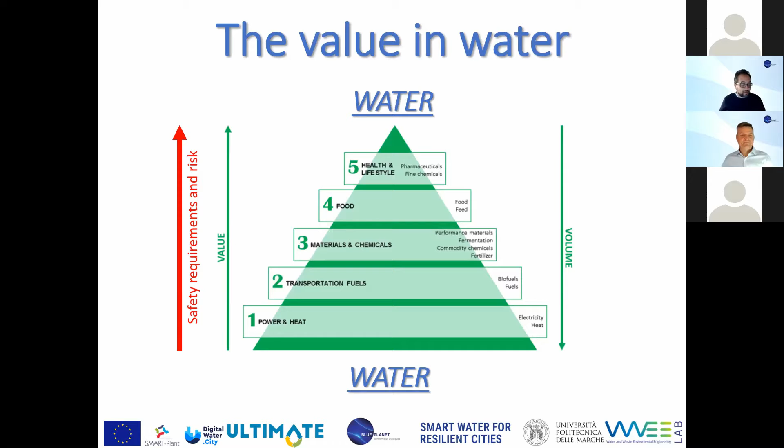So if we consider the value in water, of course, we have to take into account that the first target should be always to optimize the water treatment and, if possible, water use. So the first mission. But if we consider the pyramid, the more is the volume, the less is the value. But the more is the value, the more are the safety requirements and the risk to be managed. So energy is probably the resource with higher TRL, technology readiness level, but probably the TRL is lower if we consider the carbon footprint, and that is related to energy efficient and energy positive treatment plants.

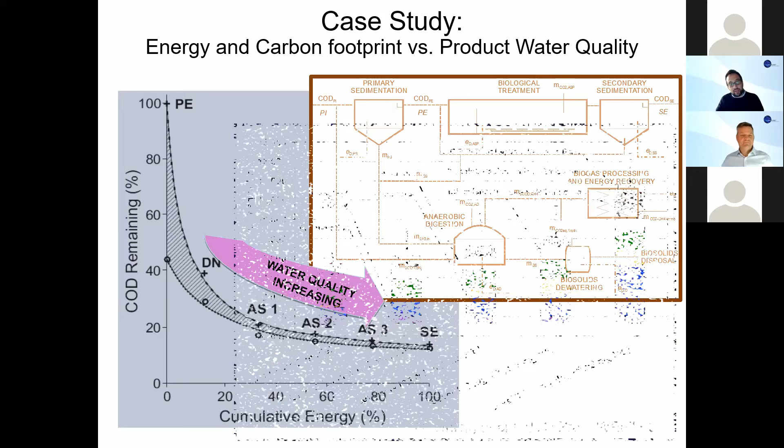This is an example of how the cumulative energy is increasing if we are decreasing the limit for discharge. And here in this graph, we can clearly see how, decreasing the limit for discharge, we are increasing the carbon footprint.

Well, dealing with energy, the energy positive treatment plants have been developed over the last 15 years, and we have full-scale examples, but most likely the best evolution has been the POWERSTEP Horizon 2020 project coordinated by the Berlin Competence Centre for Water that has demonstrated how we can increase energy positivity up to about 150% by the scheme AB plus optimization, anaerobic digestion, and power to gas, together with the advanced nutrient removal via nitrite removal.

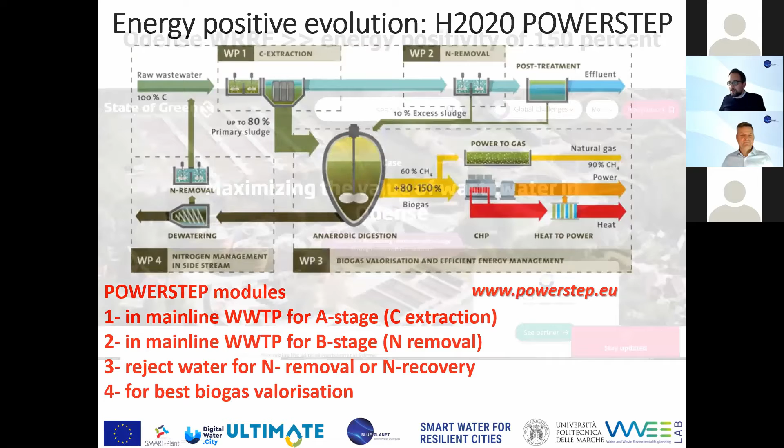So out of this innovation action, we currently have very ambitious projects, and this is an example from Denmark. The Odense Water Resource Recovery Facility is aiming at having energy positivity of 150%. So this is the status of energy: high TRL, full-scale challenges. What about other resources that we can recover?

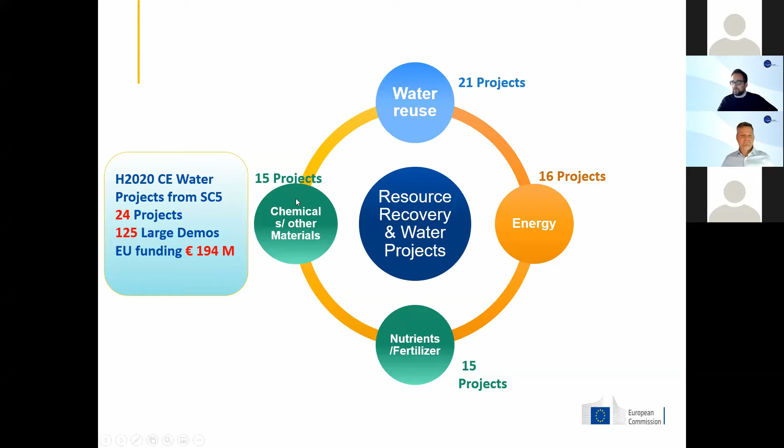Well, here I have selected some slides that have been presented by the European Commission at the workshop that we did together June last year. The European Commission has funded many projects about resource recovery from the urban water cycle for 194 million euros. In all these projects, resource recovery has been delivered in terms of nutrients recovery, mineral fertilizer and biofertilizer, but also in terms of added value organic materials such as biopolymers, such as cellulose.

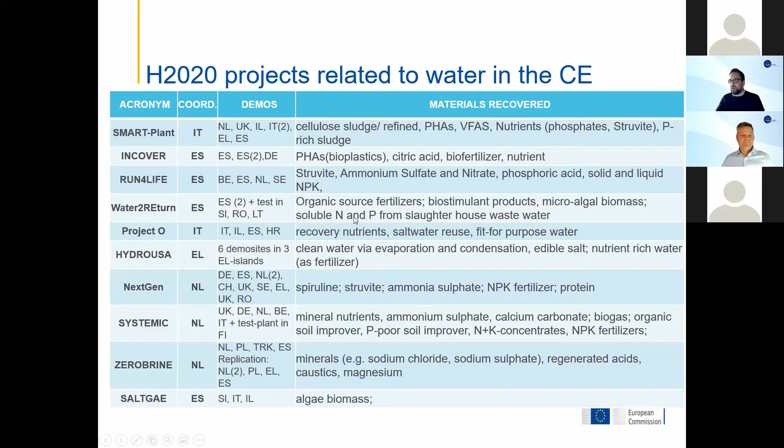And as you can see here, we have several innovation actions that have been concluded or are ongoing that are demonstrating in real environment the potential of resource recovery. But after all these efforts, all these investments that are mainly at demo to full scale, if we consider the last circular economy action plan, we can see that still water is considered for nutrient management, and water is everywhere and nowhere. So wastewater was considered an untapped resource, but actually in the current European programs it is not central.

On the other hand, as we discussed also today, these years are the right momentum because we are reviewing a lot of directives. We are introducing the new circular economy action plan. We are under revision of the urban wastewater treatment directive. So most probably our major efforts and contribution are very relevant exactly in this moment.

So when we have to address the materials recovery, if we only address the technology, we are only addressing one side of the problem, because the challenge is to keep the technical value of the material, considering also the regulation and legislation, the end of waste criteria, and together with that, we have to enable the technical skills of the water utilities.

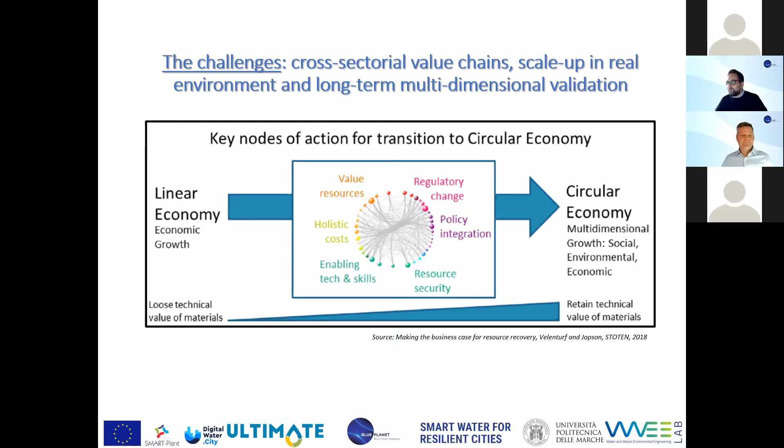So we have to integrate the existing asset by solutions that are close to what is already in place. Not to have a revolution, but to have a gradual integration. This was exactly what we did. We did the SMART-Plant Innovation Action that started in 2016 and was successfully concluded in 2020. We were integrating existing wastewater treatment plants in Europe in the Mediterranean basin in order, first of all, to reduce the energy footprint and the carbon footprint.

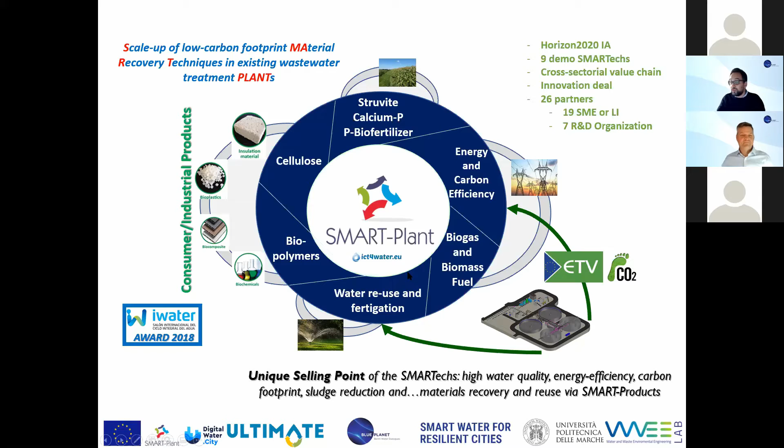That was the first point that we were asked from the water utilities, and in parallel to recover materials such as struvite, calcium phosphate, phosphorus biofertilizer, and organic material such as cellulose and biopolymers to finally deliver safe products for users or industries such as construction material and biocomposite. All this taking always into account, as you can see, the water quality that had to be delivered finally.

So here in this slide, you can see the different treatment plants that we were integrating with our solutions. And we are going from 40,000 population equivalent to 2 million population equivalent. And we are going from Israel to UK in order to have also solutions that are at a different latitude, at different conditions, at different treatment schemes with different utilities, completely public, private, or completely private.

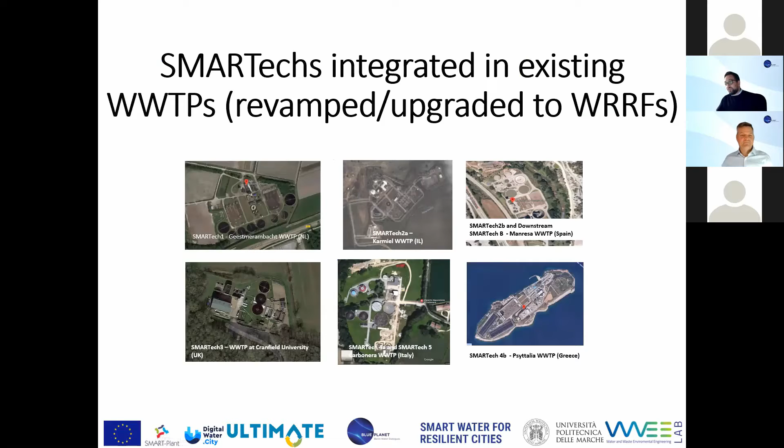In terms of technologies, we were aiming at integrating the different steps from primary to secondary to the sludge line. And here you can see the treatment plant, the key enabling process, the smart product, so the product that has been recovered from wastewater, and also all the technologies were considered for the environmental technology verification, the European protocol to validate the performances and certify the environmental performances.

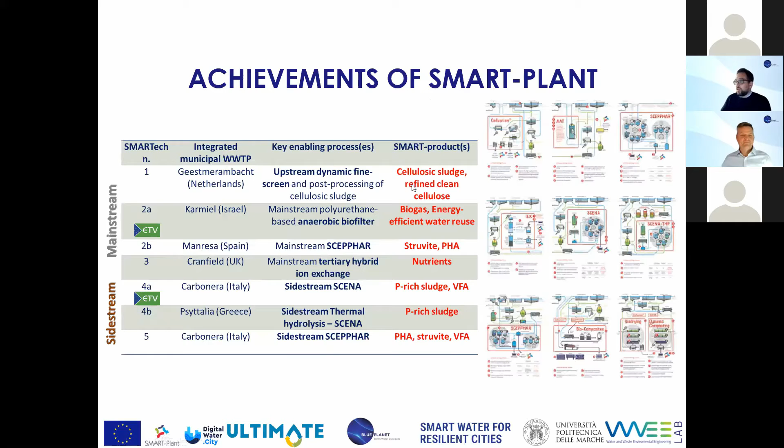Well, finally, after 4 years, we found what we call the evidence-based results. In particular, we were able to demonstrate the quantity of cellulose that we can recover from municipal wastewater, 2 to 7 kilos per person per year. How many polyhydroxyalkanoate biopolymers you can recover, 1 to 1.2 kilograms per person per year, calcium phosphate, struvite, mineral fertilizer, but also biofertilizer. All these solutions in combination can deliver energy saving from 4 to 68% and reduction of carbon footprint together with the sludge reduction. This was the first interest of the water utility, and this was the added value.

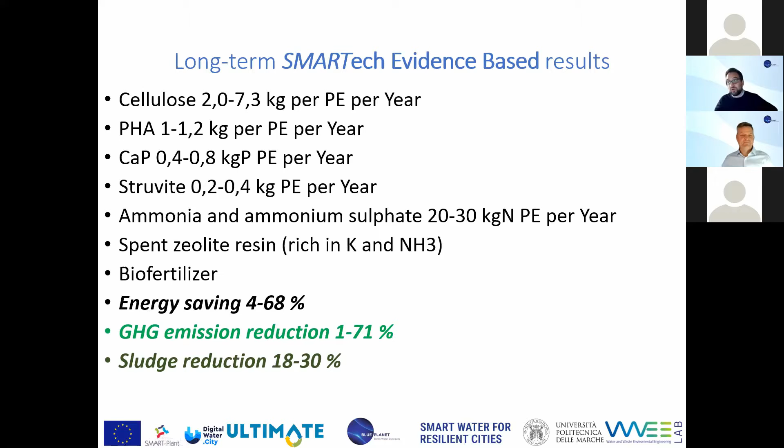What we have to consider is that some of these materials currently are considered still a waste in many European countries. So that's a major challenge. In terms of market, it's very interesting to say that the most interesting from market side is probably the biopolymers recovery that is addressing the plastic market, but it's also slower in terms of time to market. On the other hand, the fertilizer industry has quite fast time to market, but the volume that you are producing from wastewater treatment plants is sometimes not of interest for large fertilizer industry. So an economy of scale is needed there.

Very important here is the role of digitalization to monitor the efficiency and the quality of the material that we can recover. But the question was also, what about the governance? When we are recovering resources, we have to understand what is the benefit for the water user. And in fact, we were addressing this issue by using the national regulation for water utilities, the water tariff, and understanding what can be the change of water user bill if we are splitting the benefit to the water user and to the utility for new investment.

And here you can see, of course, we have an impact that is not that relevant, but there is an impact that we can report here. As I mentioned, the digitalization is a major challenge and can support circular economy.

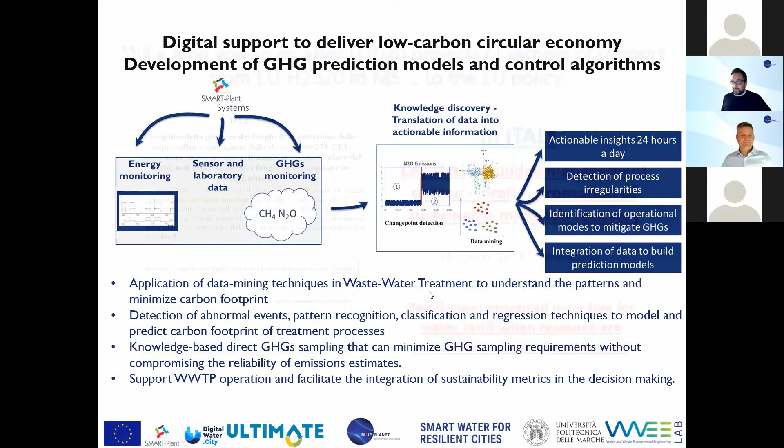So altogether it is in line with the Green Deal, of course, but at the end we were addressing practical issues that were related to the national legislation and European legislation. We were discussing a lot with the national government, with the European Commission, and finally, we understood that we have to act local to impact global.

And this is an example, the new draft decree for sludge management in Italy, where recovery of biopolymers, cellulose, nutrients is considered as a possible option. And this is a first important step, because so far there was no mention at all about this possibility of resource recovery.

We still have a lot of barriers to address, and it's crucial to consider the customer behavior, the user behavior, and it's crucial to consider the current rules of public procurement that are focusing on low cost instead of closed loops. At the moment, except for fertilizing products, we don't have a harmonized European regulatory framework for resource recovery. And we have also to consider that as long as we don't have a clear target, for example, as the target that we had for the energy sector, maybe we are not pushing enough towards resource recovery.

Of course, end of waste is a major issue, and we need a harmonization of end of waste at European level, and also a promotion of public-private partnership in order to make stable this connection between the water sector and other sectors. In Smart Plant, we demonstrated the connection between water sector and construction sector.

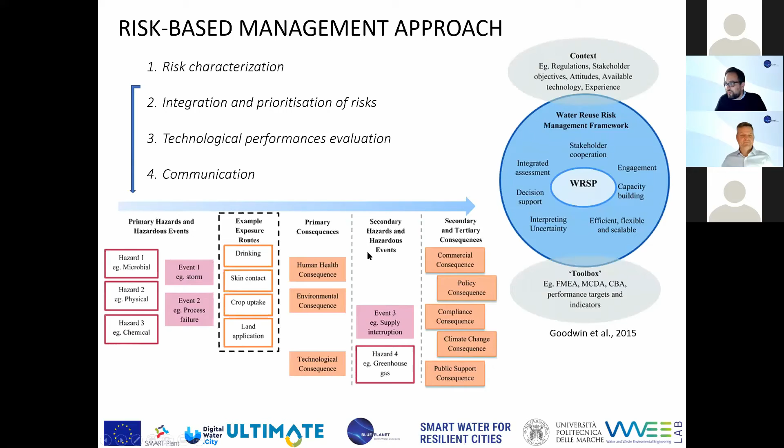I mentioned this importance of risk management, and this is very relevant for materials recovery and also for water reuse. The risk management approach should go from the treatment plants to the final user, that in this case is the human being, of course. And to address the risk management, we cannot have only a focus on the treatment plant, but we should focus on the full chain of the integrated urban wastewater and reuse system. So water reuse has to start from the sewer system.

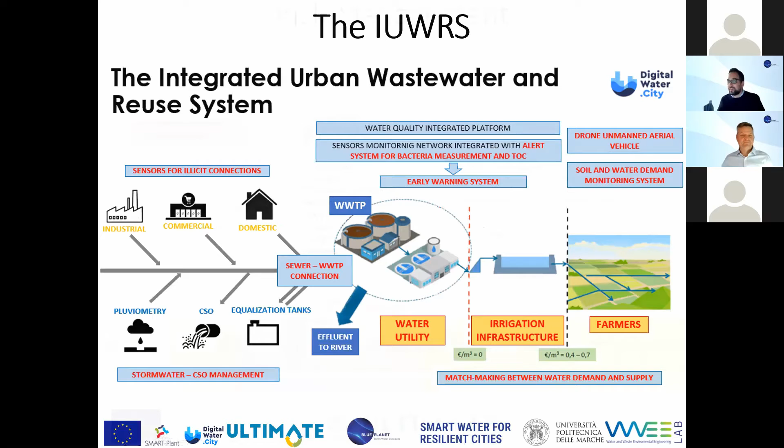This is what we are doing in Digital Water City, coordinated by the Berlin Competence Center for Water. And in particular here, we are testing a digital solution to understand the illicit connections in sewers, to deliver an early warning system to address the health risk by validating solutions to minimize the risk starting from the World Health Organization guidelines. So we are bringing together the technical language and the health need, the health standard, to finally have a clear risk matrix optimized according to the new regulation.

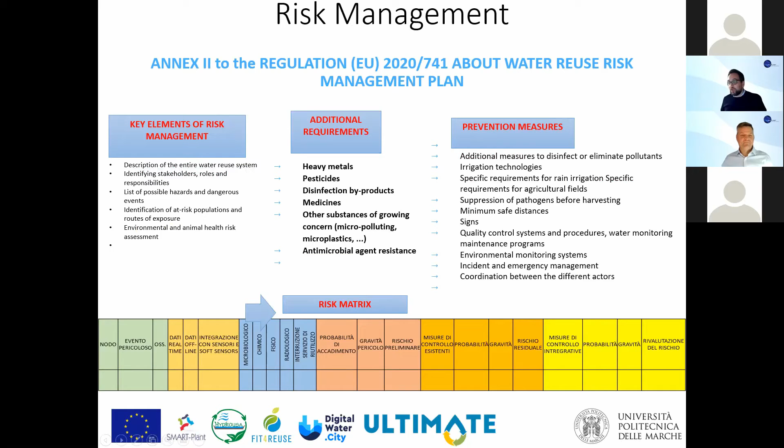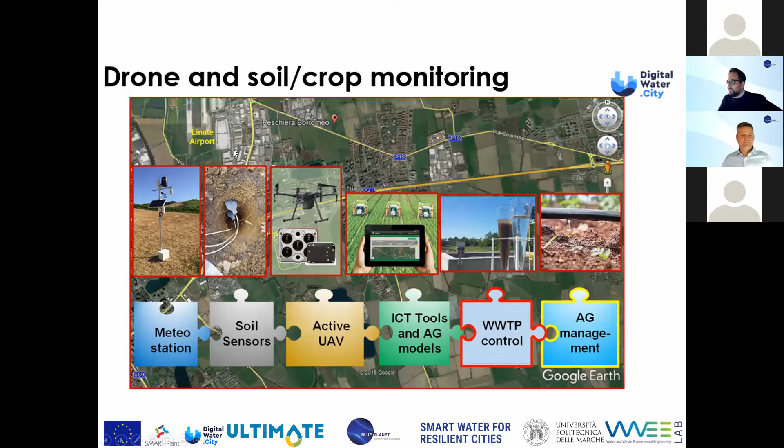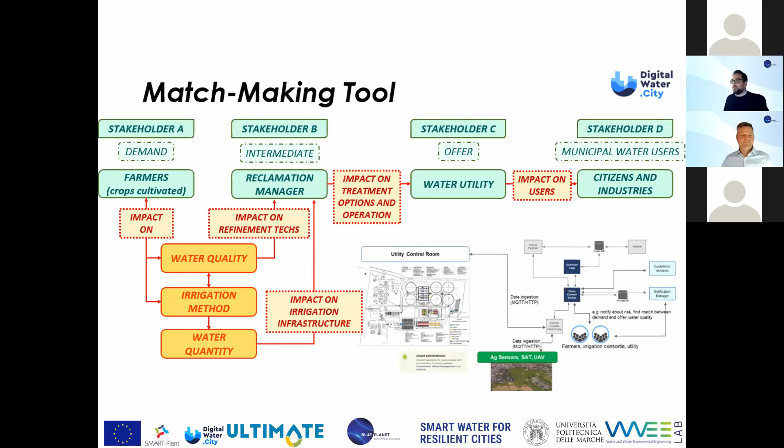How can digitalization support water reuse as a primary resource to be recovered and reused? Well, by matchmaking the need of agriculture and the supply we can get from wastewater treatment. And what we are doing in Digital Water City, we are measuring the water footprint of the local and peri-urban agriculture, and we are matchmaking the demand and the offer by a digital platform that will be developed in FIWARE. All this together with a clear measure of the carbon footprint and energy footprint, because we have finally to deliver a solution that is holistically sustainable.

So that's it for my presentation. It was fast, but as you understand, resource recovery is not only nutrients, but is nutrients and whatever has value. Thank you.